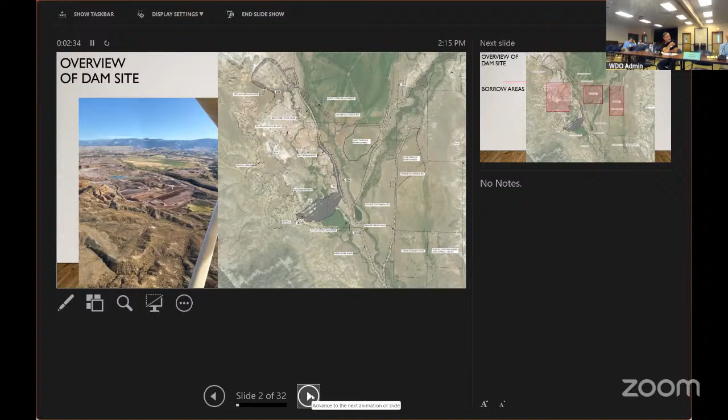And then the new reservoir's footprint will be considerably larger. Okay, Katie, you want to go next?

So we'll start out by talking about the borrow areas. There were 3 main borrow areas for the materials to build the dam: the east terrace, the west terrace, and then essentially within the reservoir footprint, we're removing most of the clay for the actual clay core of the dam. So it serves 2 purposes. One, it's materials we're not paying somebody else for because we own that land. Secondly, it also makes the reservoir larger so we get more storage.

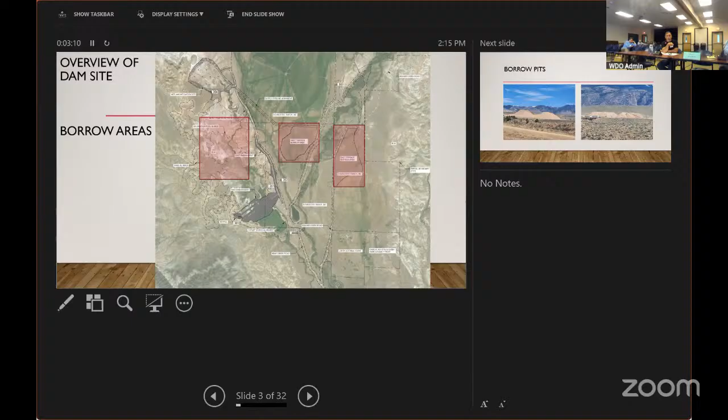So next slide. Here's about 6 months into procurement of materials. This is the East Borrow area, they're actively still mining this at this point. This was the West Borrow area last April - we had finished getting all the materials out of there. That was all stockpiled, ready to start building the dam with.

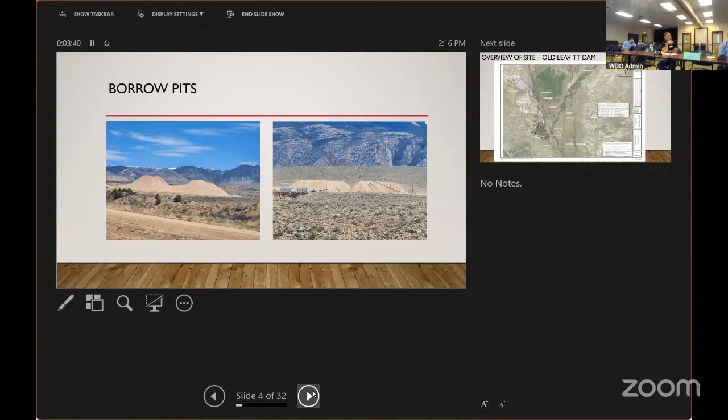So next slide. One of the other areas we borrowed materials from was the old dam and this was the footprint of the old dam. The dam had been breached about 2 years before we started construction to allow that old area to dry out. It dried out considerably. It also had about 2 foot of a crusty material and then swamp muck under that, so the contractor still had to fight quite a bit of water. But essentially everything that came out of the footprint of the old reservoir was a very silty, high organics material. That all went straight up to the wetlands and became the wetlands topsoil for the new wetlands area. So horrible material for any other type of construction, great material for building a wetlands with.

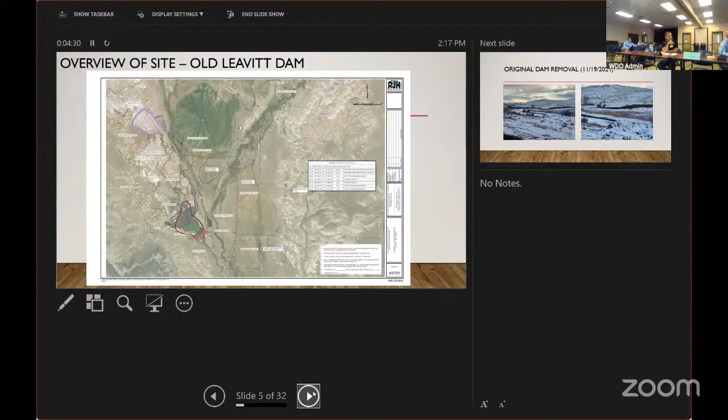Just one quick thing - so the original dam stored about 650 acre feet. The new dam's going to store about 6,500 acre feet, just as information. Yep, so 10 times the storage we're looking at.

Okay, next slide. So now we'll talk a little bit more about the actual dam here. Up through here is the east embankment. So if the dam gets close to full, there's the potential for wave action and stuff to slide some water over to this other valley, so there's basically an embankment here.

The dam has been in construction since last April. The east embankment was actually started this week. So I went up hoping to see some of that east embankment being constructed - it started on Monday, so actually yesterday. So I missed getting to see that at this point. So next slide.

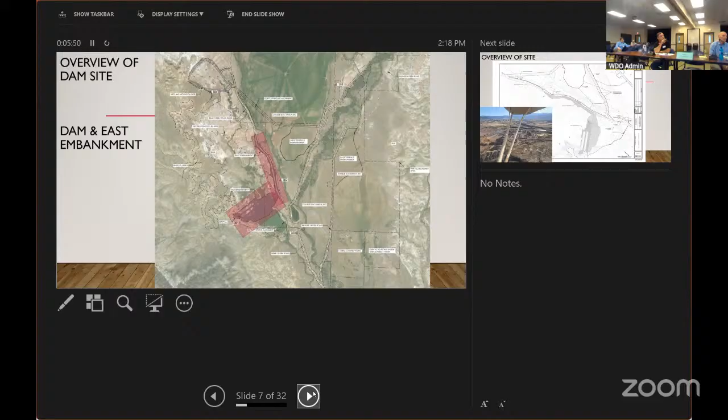So again, you can see here, this is the dam. In the aerial photo, you can see that constructed here. The far, I guess it's kind of east-northeast side, is fairly close to full grade at this point. The very west side down here is basically still at bedrock - they just cleared it to bedrock within the last couple of weeks. At the very, very far end, they're actually still excavating some of that material out to clear it up.

So the dam is progressing from the east to the west. The east is almost at full height, the west hasn't even been started. So we've moved a lot of dirt, we've made a lot of progress, but we still got a bit to do between now and December because we're supposed to be storing water in the spring. So next slide.

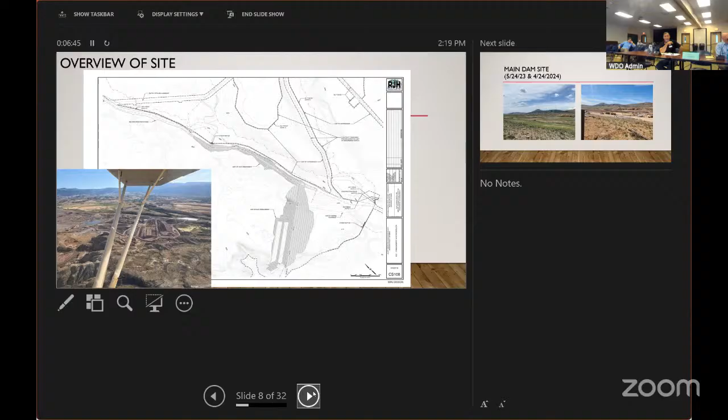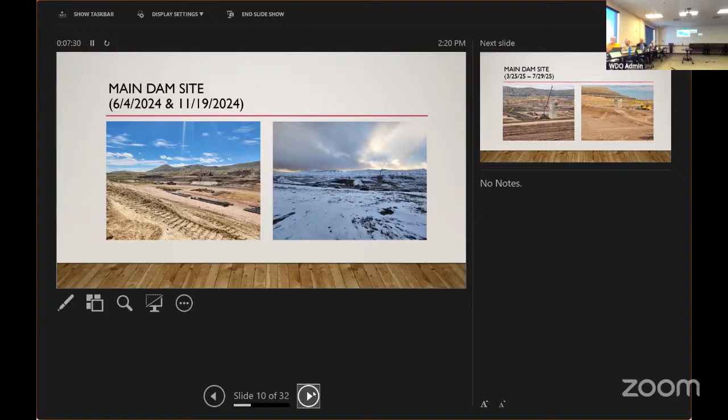So June of last year, we're starting to get a little bit of a dam showing up. November, when they shut down operations, we had a pretty good footprint. So this is the downslope toe of the dam, this would be the upslope toe of the dam over here, and just starting to come up on the full height of the dam. Next slide, Katie.

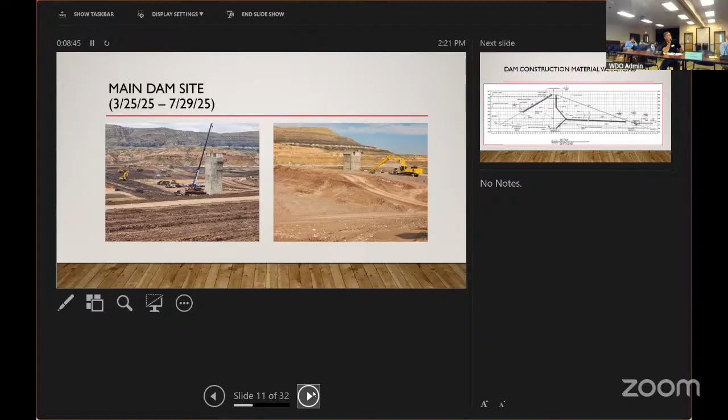So, next slide. This is kind of a cross section of what the dam looks like. This center section right here, this 4A, a little trapezoidal section, that's actually the clay core. That's what holds all the water in the reservoir.

Behind it is various sand layers that, if any water gets through the dam, we want to pick up that water and get it controlled out of the dam so we don't cause any erosion. Essentially the rest of the dam is weight to hold it in place, so when the water is there, it doesn't push this down slope. On the east side, this is relatively narrow for a dam. As we go west, it gets wider because there's a mudstone that doesn't support the dam as well, so the dam had to get bigger to have enough weight to actually hold it in place.

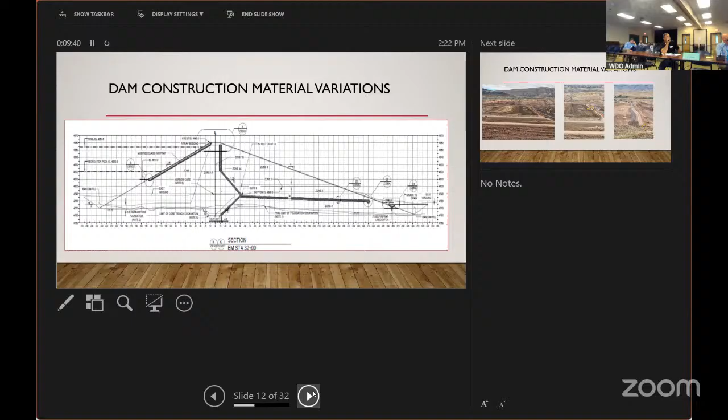So next slide, you can kind of see some of those layers here. This very light tan is a coarser sand. The red sand here is a very, very fine sand. And then this kind of purplish maroon material behind it is the clay that we talked about.

You can kind of see that here. And then this is from the other end of the dam, this is last week looking. So this is that clay core with these sand layers. On this side, upstream is over here with these, and downstream is over here. We're looking the other way now, so downstream is over here and upstream is over here with the tower there. So that's the various layers.

It's a fairly wide dam on the one side because the subgrade wasn't ideal, and it's a very wide valley here. Unlike some of our other reservoirs, this is a pretty wide valley, so it's a pretty long reservoir or dam for some.

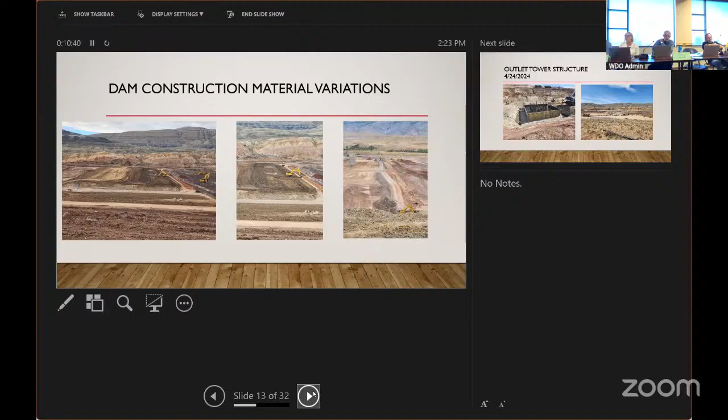Okay, next slide please. So this is the control tower, the outlet tower. Last April, they had excavated down to bedrock and poured a concrete pad on top of that bedrock, and we're starting the foundation of the tower. At that time, there's the crane here. You can see the crane here. You can't even see the tower yet.

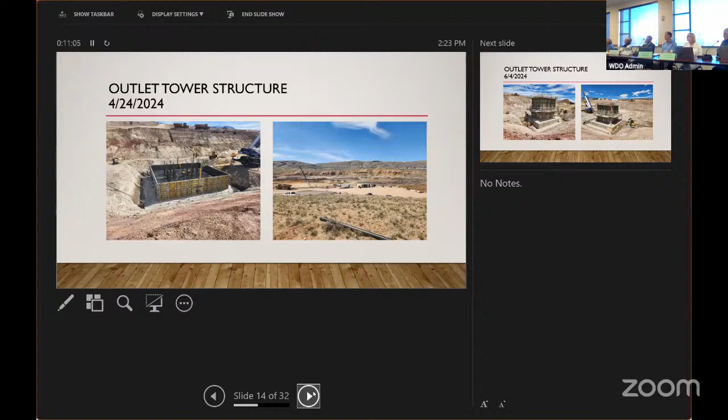Next slide. So this is not quite 2 months later. That area you see formed up was here, and now we're actually building part of the tower. Right here is the low water intake. You can't quite see the pipe there, but that pipe runs this way, and that's what we would use if we were actually going to drain the reservoir. Essentially, we should never probably drain the reservoir unless we're doing maintenance, like a 50-year maintenance. This should keep a dead pool for recreation and other uses

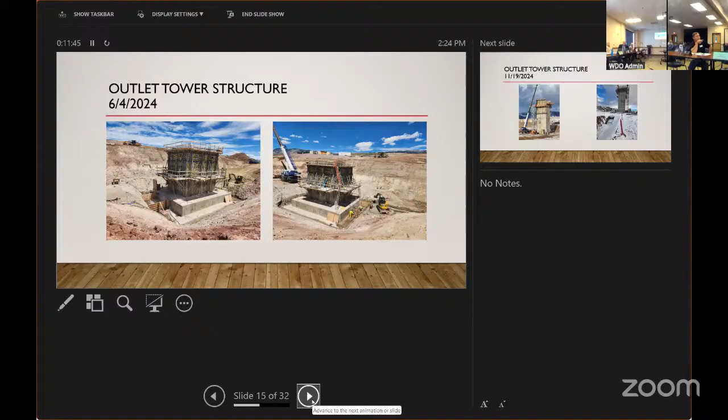besides the irrigation water. Next slide. So this is November last year. That pipeline I was talking about is below ground here, and this is its opening, and this would be what was used to drain the reservoir if we were going to drain the reservoir. Then there's 2 outlets that you can see here, one here and one high water. Assuming the water's full, they can control the water coming out of the reservoir using those 2 different outlets, and control the temperature of the water. That helps the downstream and fish have the right temperature of water if they choose, or if the water's lower, then they can just use the lower gate.

And then, on the other side, which you can't see from here, there's the high water outlet. Okay, next slide.

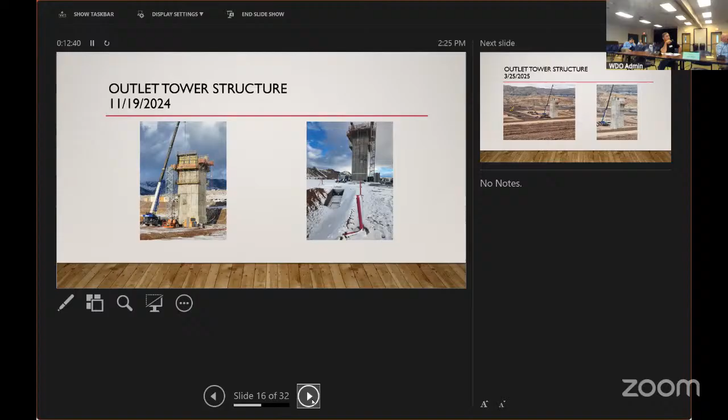So this is March this year. The tower is essentially done. Eventually, once the dam is going along, there'll be a little control building up here to actually control the valves. It's not much, everything on this structure is manually controlled. The irrigation district did not want a lot of automation. So we've got some cranes and stuff like that, but it's mostly manually operated.

That was to help cut costs a little bit when we were looking at being overpriced. They were also worried about future maintenance costs, since they were used to using manually operated gates, and they said, well, just keep the costs down and keep future maintenance down by going manual.

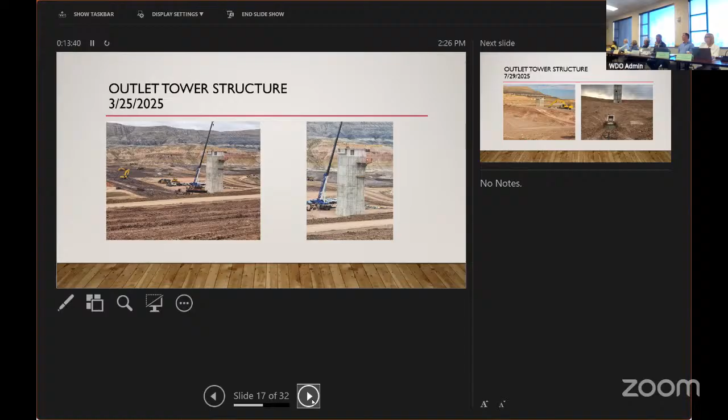And then, like I said, that bridge will eventually come from here over to the tower. And on this picture, you can kind of see this working platform down here. If you look at the next picture, by now we're filled up to that level.

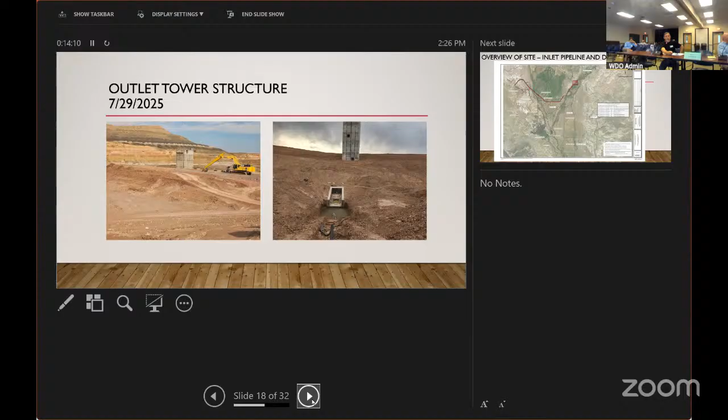And then this is downstream. So essentially at this portion of the dam, we're very close to done, this slope is done. Up here, the dam will continue to rise, but the tower itself is pretty much buried as much as it will be. It'll be out in the water once the water is raised, and then you'll take that bridge to get out to control the gates. Okay, next slide.

Okay, backing off from the actual reservoir, now we're looking at the inlet structure to fill the reservoir. Beaver Creek comes down through here, so it fills off of Beaver Creek, and then it runs a pipeline over here, which dumps into the wetlands. And then there's a little cutoff pipeline right there that you can kind of see in red.

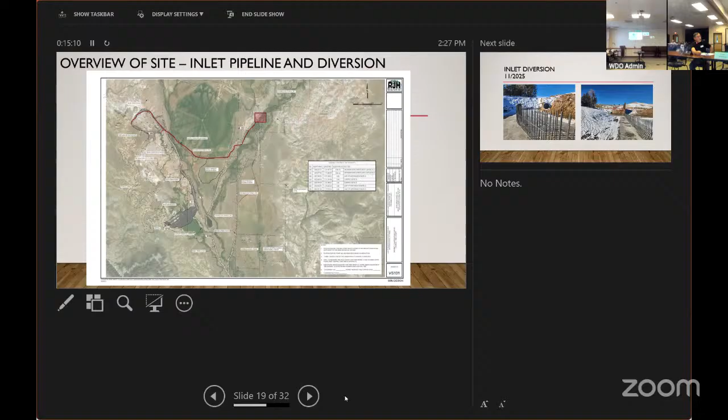If for some reason we're doing maintenance on those wetlands and don't want to put water in the wetlands, but we want to put water in the reservoir, we can bypass the wetlands and put water straight in the reservoir. But most of the time we should be running the water into the wetlands, running across the wetlands, and then it dumps into the reservoir. That helps take out any sediments we may have, keeps that wetlands working, and delivers pretty clean, clear water into the reservoir. Okay, next slide.

So this was November last year, getting ready to build the inlet diversion structure. You can see the end of the pipeline here in both these photos. This is actually the diversion structure where the water would be taken out of the stream. The stream will be running here. In this photo, it's running parallel to that rebar. In this photo, it's running across the rebar. This is the weir wall right here.

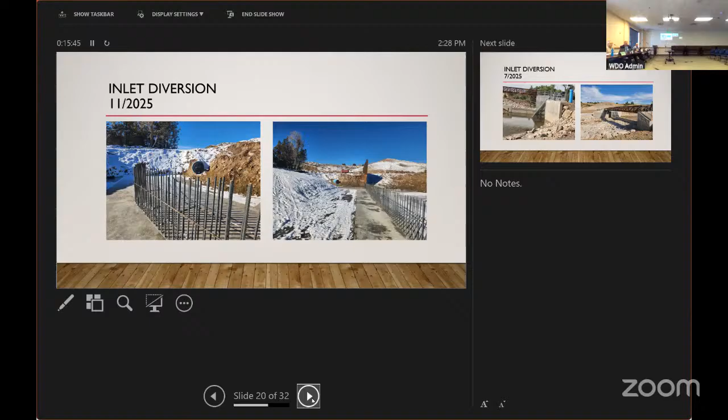So next slide, and this is what it looks like finished. This is last week. So that diversion pipeline is over here, and this is an air vent for that pipeline. The water comes down the stream. At this point where the water's too low to run over the weir, it cuts through the trash rack and goes out a gate right about there, which is that here on this slide. And the active stream is running down here at the moment.

This looks very large compared to the stream. However, in the spring when it was flowing, it was coming over the high weir wall. So not only was it coming over the weir structure here, it was coming over the higher wall. I believe for about a week it flowed enough to come over the higher wall. So the structure actually is the size it needs to be. The landowner was a little concerned because it looks a lot bigger than they thought it looked on the plans. However, that also explains why we bought as much land from them as we did to build this structure.

So basically everything there is physically built and operational. What we don't have at this point is some of the electronic controls, monitoring equipment that the SEO's office needs to monitor the water to make their determinations, and some things to let the district know.

Again, this doesn't show up real good in the photo, but there's a manual gate right here. This is again operated manually because the district decided to keep the costs lower on construction and keep their future maintenance costs lower by not having to bring electricity out here. The electric controls we need can be run by solar.

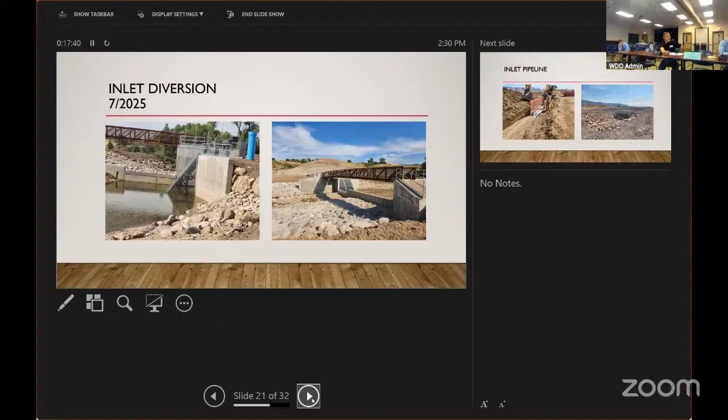So we're 3/4 of a mile away from that inlet, and this is where the water dumps out into riprap and goes into a canal here that feeds the wetlands.

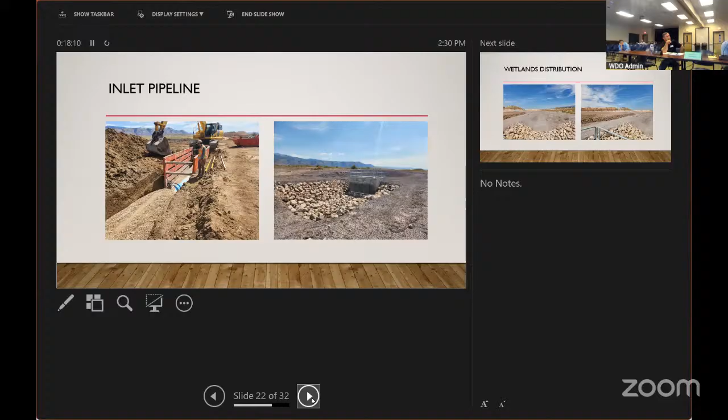Okay, next slide. And looking the opposite direction, this is that riprap we were just looking at, and the canal going out. This soil here is hard to see, but inside over here, all this soil is at its final grade. There's a rim of soil going around. Right now there's a little 2-track road going around as they're finishing construction. This soil will eventually be pushed over that 2-track road so that it's all topsoiled outside of the canal area.

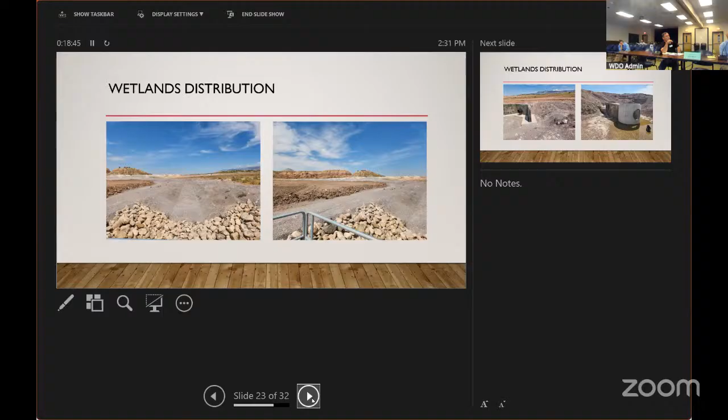Next slide. This part of the canal over here is not constructed yet, but this is what one of the outlets looks like. There are 3 outlets coming around a curve of those wetlands, and they can control the water. So if one part of the wetlands isn't getting enough water, they can close down one gate, open up another gate, and keep the water flowing.

So the idea eventually is to get it where it flows evenly across the wetlands, but they do have some manual control to adjust things to make sure the wetlands stay wet and producing lots of cattails and stuff that we're supposed to produce in the future. All 3 of these look essentially the same, and the canal hasn't been rebuilt, so there will eventually be dirt canal built on either side of this to finish it off.

This is that bypass outlet pipeline. The pipeline comes in here, goes into a control structure here, which will eventually have a valve. So if for some reason they need to bypass the wetlands and get water to the reservoir, we can bypass it through this pipeline. Okay, next slide.

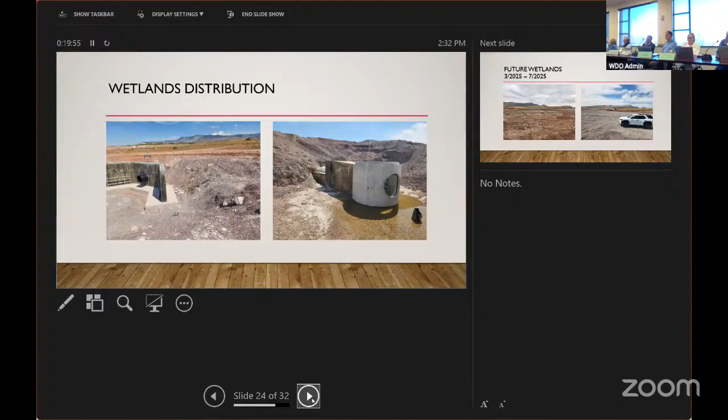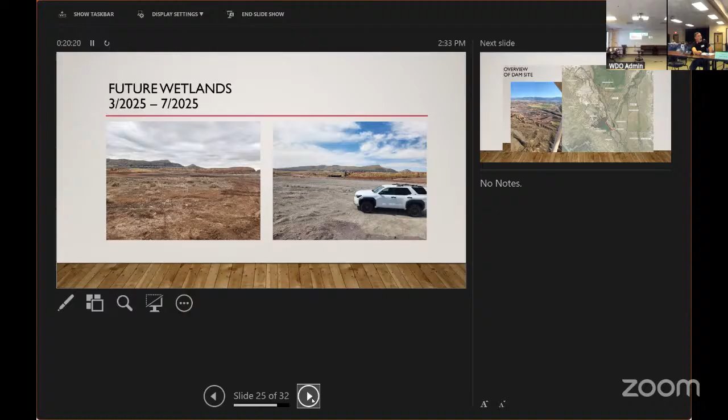This is kind of a long view of the wetlands. It's hard to see, not much to see here, but basically it's just a topsoiled area that will be seeded in eventually with various wetlands plants, primarily cattails, to replace the wetlands that were disturbed by removing the old reservoir. Okay, next slide.

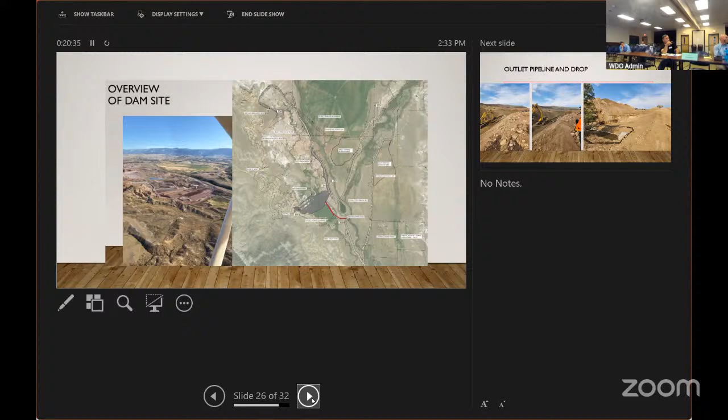Okay, in the last section, we'll talk about up here at the reservoir. So we're back here looking at the dam. This is the air photo looking at the dam. This is the outlet pipeline, and primarily the outlet pipeline brings the water out and dumps it back into Beaver Creek.

So we took it out of Beaver Creek over here, brought it over, put it in the reservoir and stored it. Then we'll bring it out of the reservoir, put it back in Beaver Creek, and it'll go downstream for the irrigators to use.

There is a small pipeline that cuts across over here, and that's to replace the little bit of water from this drainage that we're basically damming up - this unnamed tributary. So we dump water back into this unnamed tributary to keep its wetlands operational after the reservoir is done, and it eventually flows down and ties back into Beaver Creek about 3/4 of a mile downstream from the dam.

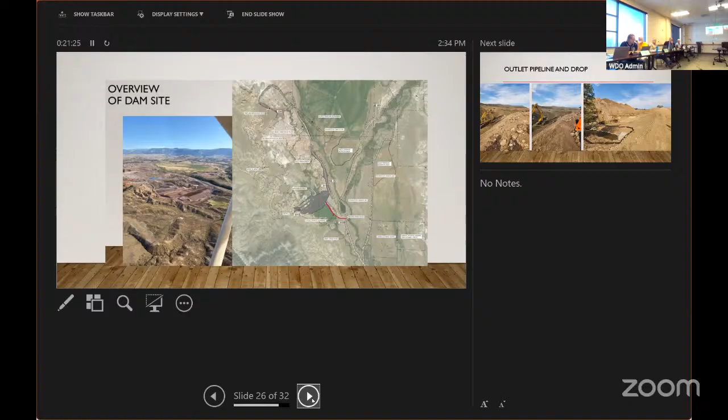But they've been good to work with, understanding that they kind of trust us that we'll get it back looking the way it's supposed to be when we get done. Unfortunately, almost everything is still torn up now. They see very little in this area that's actually been remediated and back to grass. So they trust us, but they question us.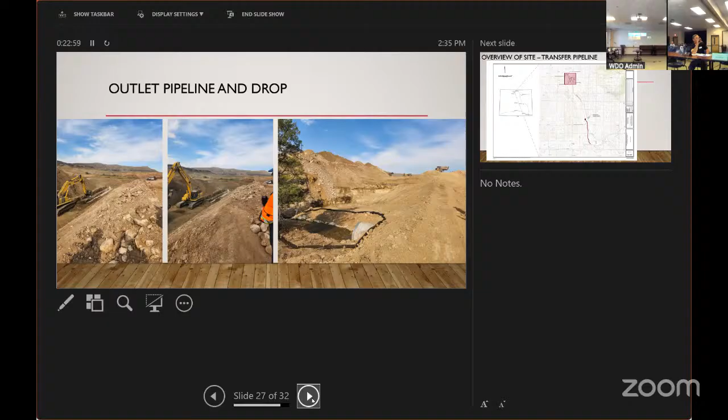Okay, so that's pretty much everything at the actual dam site and everything related to the actual reservoir. I can't remember, do you remember how many miles downstream it is for the bypass? It's like 6.5 miles.

So there's several irrigators along this pipeline that will get water from the reservoir, and then also many more irrigators down the canal that will get water after we dump it back into the Shell Canal. That's already part of the irrigation district. Yeah, I might just mention, Shell Canal is where the majority of the irrigated acres lie.

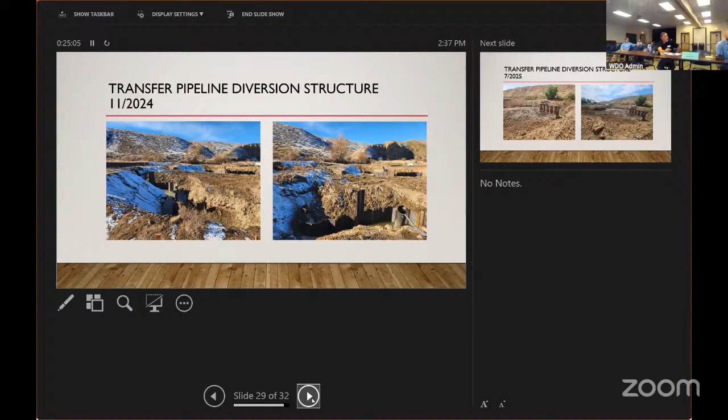So that's what it looked like in November of last year, was just a little bit of pre-excavation and sheet pilings. Next slide. So as of last week, they just started working on this again, and they've excavated that area in between those sheet pilings. So that's where the concrete floor of the diversion structure will be in the future, is that grade you're seeing right now. So really not much has changed there in 6-8 months, but this structure is just going to start getting built. Basically, last week, they just started working on it. So it'll be finished by this fall, but isn't quite there yet.

And coming out of, you want to go back one? So basically the water will be diverted over here. The pipeline runs kind of along the slope here, which is an original canal. There was a small canal there. We're replacing that small canal with a slightly bigger pipeline, but it'll also become pressurized so that when we get to that low spot where Shell Canal is, we can actually push the water up and over the other side. Okay, next slide.

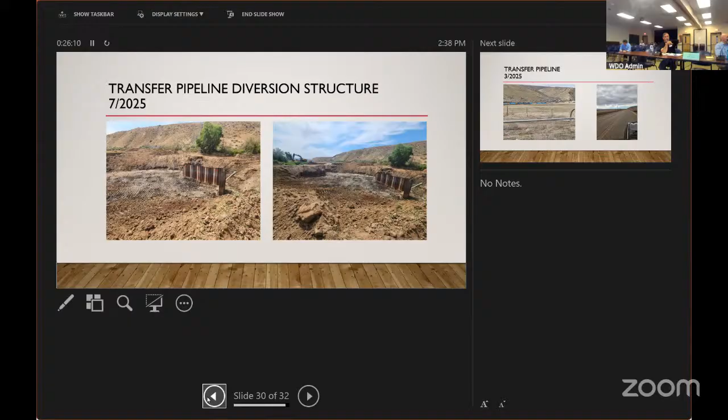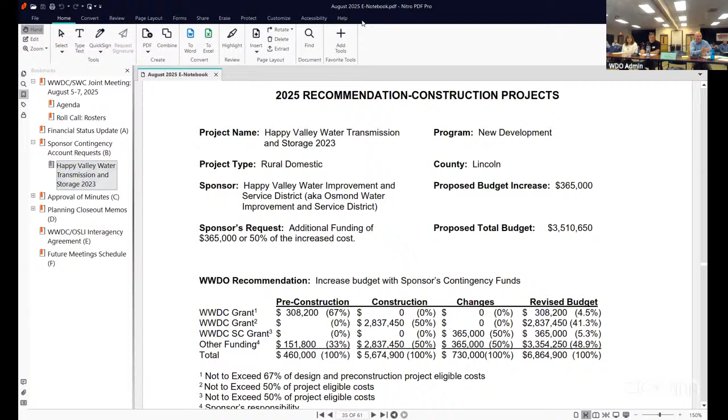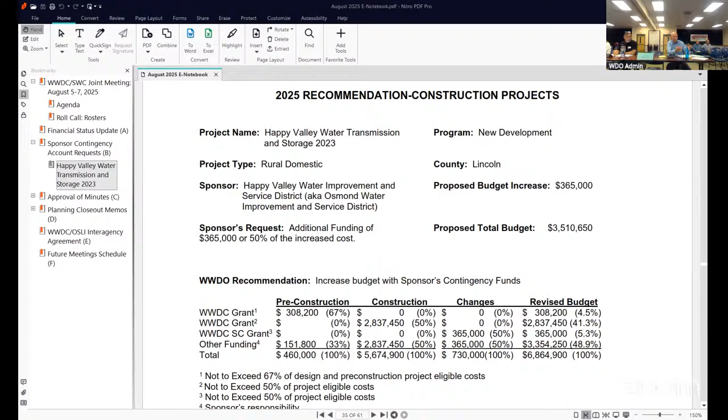And then if things come up during the year outside the session, such as what we're going to be hearing today, a bid comes in a little higher than we expected from the engineer's opinion of cost, we can analyze that, make sure it's a good use of the money, and jump on that bid and continue forward by coming back to these two bodies and getting permission to do that. We don't have to delay the project and go back through the entire legislative process to get more funds appropriated, then deal with inflation and rebidding. So it's really to be reactive to unforeseen bids, or if something comes up during a project that was unforeseen, we can react to that faster too. So just a little background, and I'll hand it over to Bill.

Okay, I think we're on page 35 or 36 for this in the e-notebook. Chairman, Commission, Select Water Committee, Bill Brewer, Deputy Director of Construction again. So this project is a 2023 project. It was a pipeline, a regionalized system. We had two separate communities that essentially joined together to form a regional system to save costs. They both had individual pipelines coming down from the mountains, and they were both wearing out. So the idea was to replace two pipelines with one pipeline and serve both communities.

Along with that, a storage tank was added to make the system work more efficiently. This was set up in our new style where they were given pre-construction funds to get this moving along at 67% grant. When we got to construction, unfortunately, because of the way funding is right now, it was dropped down to a 50-50 match for the construction portion. Because the pipeline and the tank are nearly the same size projects, and two totally different contractors would do that type of work, we usually find it more efficient, and the engineer also decided to split the project into two bids and bid the pipeline out separately. We also had some concerns - there was a large portion of ARPA funding on this, and we wanted to make sure we spent those federal funds and didn't lose them.